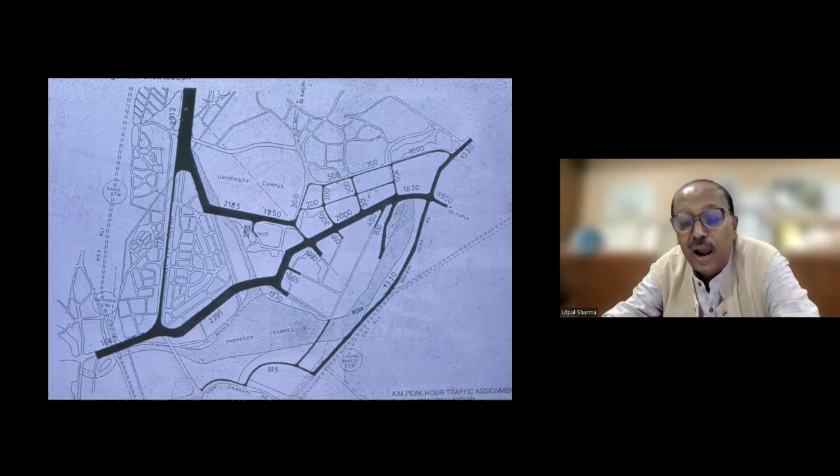And this site is very near to the present Mumbai airport, so there are certain height restrictions for this area, not more than 10 to 12 floors. We cannot really do skyscrapers because it comes in the funnel of the airport. But it gives a kind of broad scenario of the site at that point in time.

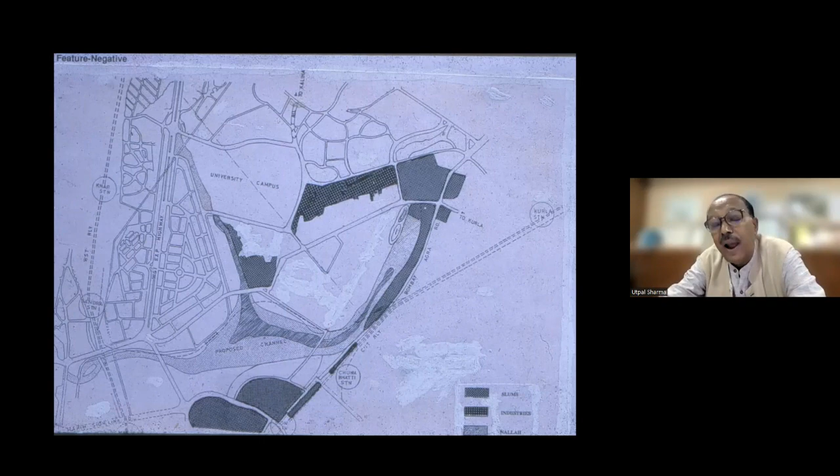As you see, the site is nothing very particularly impressive, because the site was with Mumbai Metropolitan Region Development Authority, and it was surrounded by slums. We have some creeks which are not very well managed and developed. On the other side of the creek, we have one of the biggest slums in the world called Dharavi. All of this is happening together in this piece of land, and while making a development in this area, we have to turn all these negative externalities into a positive situation. But as of now, before we started the project, the site is surrounded by a lot of undesirable activities.

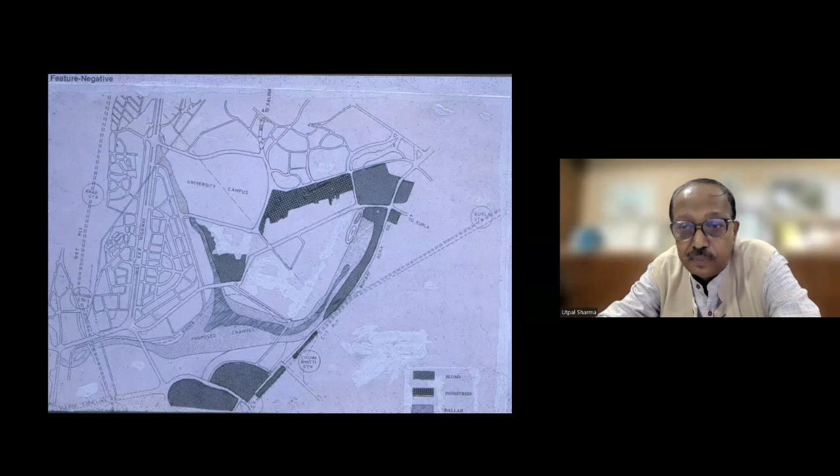And this is the creek, which is also highly polluted, but there are some amount of mangroves, and it also kind of drains the site in terms of flood water and rainfall water that goes out through this channel.

Then you see some photographs on the right-hand side, middle, that is the site, and surrounding the site you can see some slum development, some areas for housing, because the site of Bandra Kurla complex is much larger. But when it was handed over to Maharashtra Housing Development Authority, they made a lot of housing and also the business center. After it changed so many hands, now we are at the right agency with the right kind of site to take care of in terms of making a financial district.

As you see, the site is surrounded by some amount of slums, some amount of housing, and there's nothing very pleasant about the site. The site is just lying there, and slowly, if we had not developed the financial center, it may as well have been encroached by some of the slum dwellers.

But at the same time, when we started this project, we thought we need to learn from the city of Mumbai and some of the cities across the world in terms of defining the built form character and the kind of image that you want to have for the new citizen.

So this part is called the DN Road in the city of Mumbai. Basically, low-rise, high-density buildings of 4 to 5 floors with an arcaded street, etc. That's what is the kind of peculiar character of the city of Mumbai.

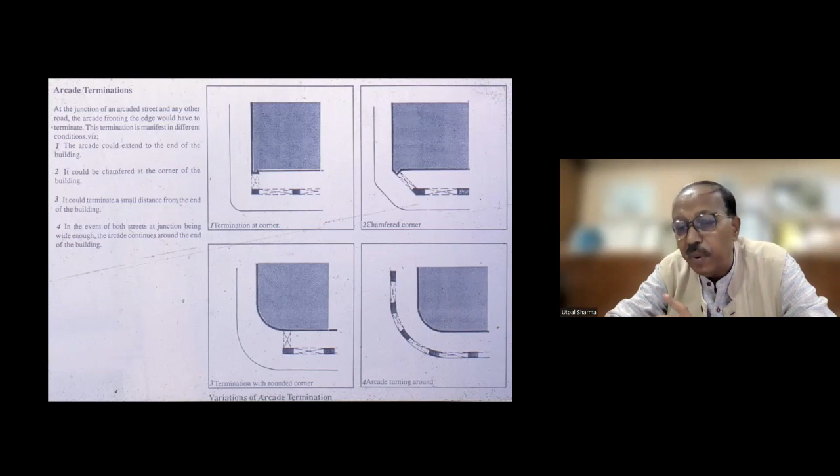There are also some studies carried out by some of my students in terms of the arcade, how it terminates, how it goes, etc. We thought that in a city like Mumbai, where you get a lot of rainfall and a lot of people walking around, an arcaded street may be a good idea even to pursue in the new proposal for Bandra Kurla.

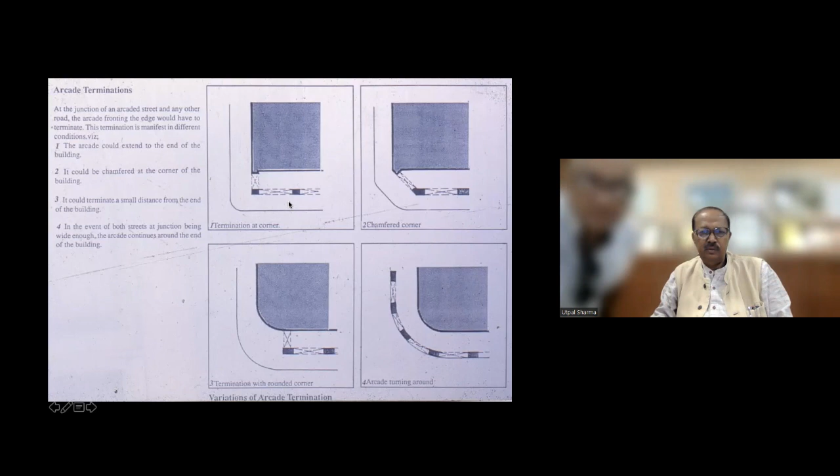Then there's some of the business district areas which already exist. There's a lot of informal activity that happens during the day. In the evening hours, people go back home and some of these places where business was happening become very deserted, and it becomes a kind of dead place in the evening.

So we also thought that when we were doing this proposal for the Bandra Kurla complex, we have to create life in the public space throughout the day and even at night, so that we can have a certain desirable kind of activity mix, so that this place doesn't become a dead place after office hours.

These are some of the areas, Ballard Estate areas, where some of these Tatas and Birlas and big business houses operate from. This place is basically at one corner of the city of Mumbai. Everybody uses taxi as public transport and doesn't really bring in their own private vehicle, and this area works very well with a taxi system.

Some of the areas are called Horniman Circle, done during the British time - a beautiful garden in the middle and an arcaded building with 4 or 5 floors. This can really define the character of this area, which was done about 100, 150 years ago. But now in modern urban planning, we have buildings as some kind of boxes, and it doesn't really have the character that this place talks about. We thought that when making a new plan for the Bandra Kurla complex, we have to bring some of these characters into the new city we are trying to build.

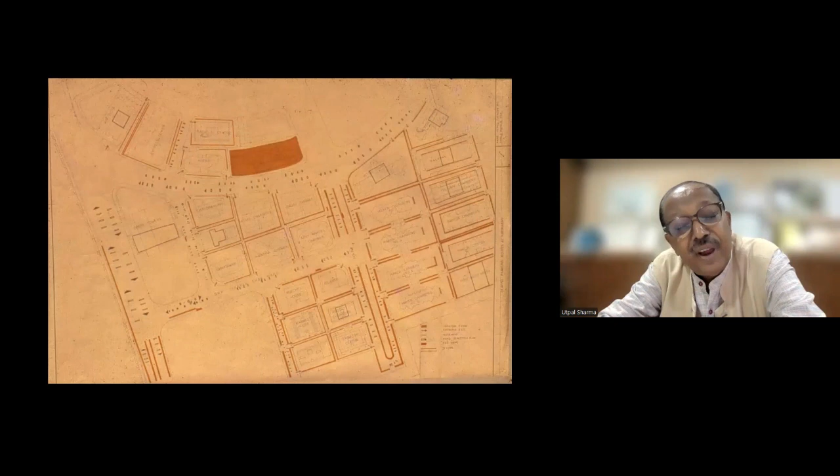Then these are some studies of the core areas of the city of Mumbai. You can see the simple subdivision of plots, very little parking, compound walls between properties, and a lot of traffic jams and congestion in this area. We'll see some of the pictures.

What you see is the kind of present financial center for the city of Mumbai, where it has no character - we basically have certain high-rise buildings. It doesn't really talk about a befitting character for a financial center like the city of Mumbai.

There's also a whole lot of informal activity happening around business houses, where people come for breakfast, lunch, etc. If we don't provide for it, they occupy the public spaces, particularly the footpaths and street corners, and many economic activities take place there. So in the new plan, we have to take care to provide for such informal activities also.

Then this is some of the areas developed near our site as a kind of office complex for financial centers. But here is what the government does - they design one building, change the facade a little bit here and there, and repeat the same building. That is not really the urban design you talk about. This is just a congregation of buildings to facilitate certain economic activities, but it doesn't really talk about a befitting character for a financial district.

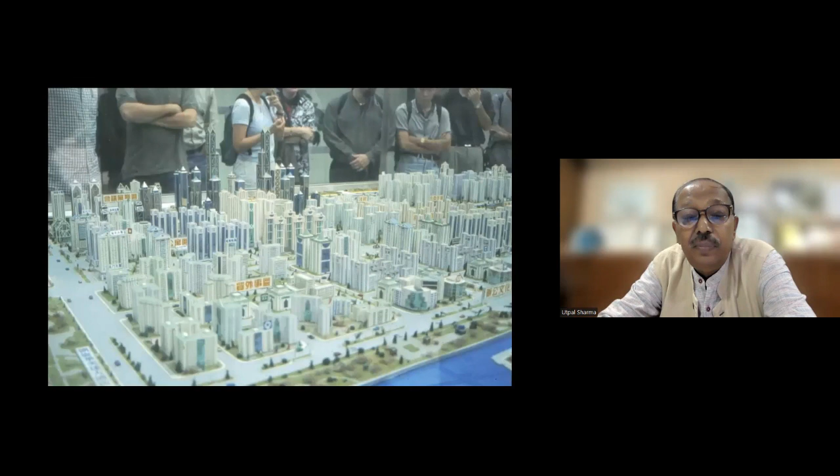This is the new city center for the city of Guangzhou, with a population of about 12 million. This is what they were doing. These are some of the study models—all high-rise, high-density cities that they were talking about.

From there we had a chance to come to Shanghai, and from there to Hong Kong. Hong Kong is a very polished city. You find that Hong Kong is one city where almost 97% of the traffic is in public transport. Roads are not very wide, but there's not much traffic. The FAR, because of the urban form of the city, was almost anywhere from 10 to 12, which is very, very high. Mumbai is still talking about FSI 1.5 to 2, but Hong Kong is talking about FAR 10 to 12.

The whole core city area is connected by an elevated pedestrian network, connecting to the various buildings and also to the public transport system, the metro system, and also boats taking you to the various islands. Everybody is busy walking around, and it's a place where you can walk around without having to cross the vehicular road because you're operating at the second floor level.

Look at the city—there's hardly any traffic, but everybody is using some kind of public transport system. Roads are not very wide, but there's no traffic because they really emphasize public transport as a way of life for the people of the city, and they invest very heavily in the public transport system.

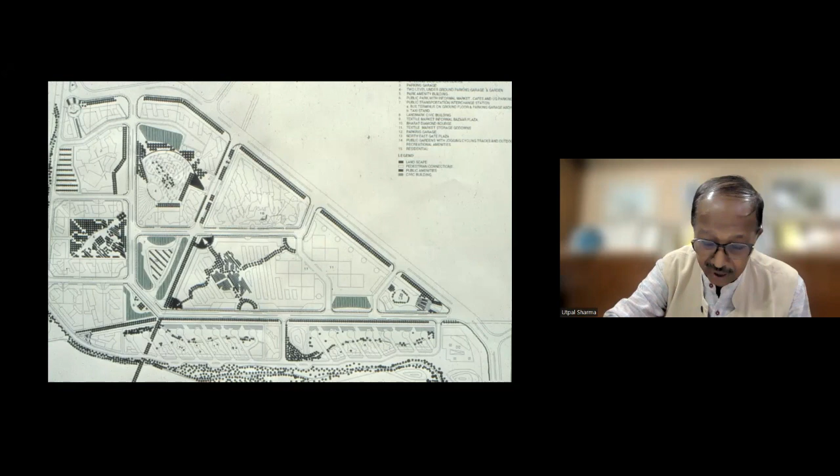For the Bandra-Kurla complex, the Mumbai Metropolitan Authority had no clue how to develop this area - they were basically subdividing land and selling various parcels to people. I was working on one of the projects of the Bharat Diamond Bourse with Professor Doshi, and we told him how can you make a plan for an area of 8 hectares of land with multi-level offices without an overall plan for the area. So we insisted that we would do a preliminary master plan to show what can happen, and then they should appoint somebody to properly do the master plan for the area.

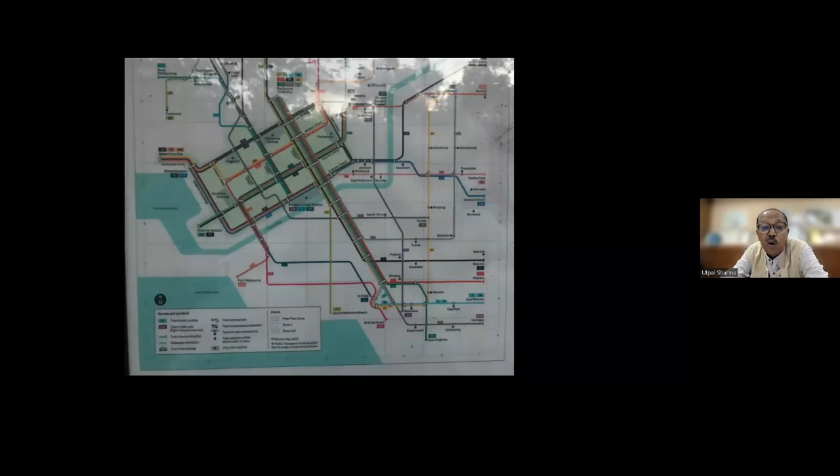As part of this, I also had a chance to visit Melbourne, and we saw that some city blocks are slowly being made pedestrian with vehicles eliminated. Now people are basically on pedestrian streets and public transport, and the city is working quite beautifully as a pedestrian-friendly city with bicycles and public transport, with cars slowly being eliminated.

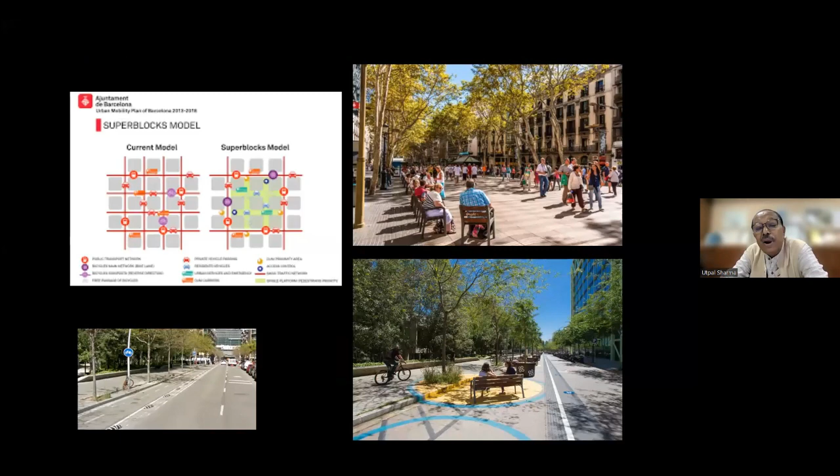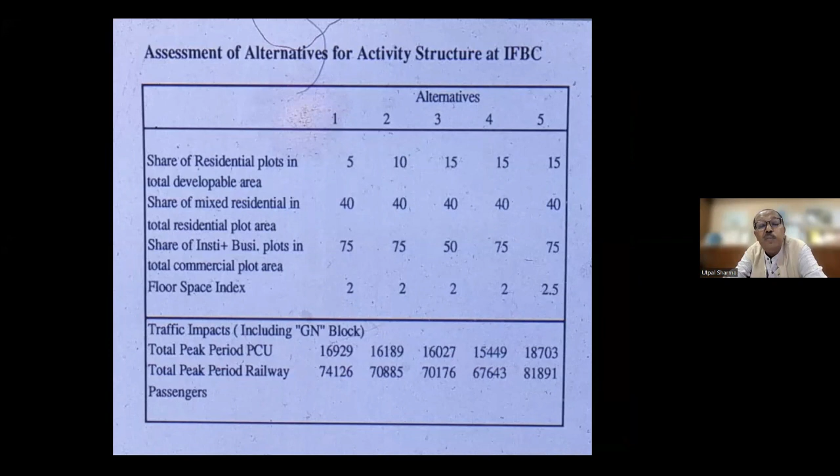Now coming back to our site, for the Bandra Kurla complex we had about 120 hectares of land - so how much traffic can we handle, and what kind of activity mix can we propose? This is a place where you can talk about a higher FSI if you want. We worked out various alternatives with respect to the mix of residential and other activities, and finally tried to relate it back to the traffic it would carry.

Eventually we presented to the government saying we could get an FSI of around 2.5, with a higher share of residential population living in the Bandra Kurla complex, because they would live and work in the same place, and in fact reduce the traffic. But finally the Assembly of Maharashtra gave us an FSI of 2, not 2.5, but this is still much more than the 1.3 that is happening in Mumbai.

We got an FSI of 2, and we moved ahead with a proposal for Bandra Kurla complex in terms of urban design with an FSI of 2. And this was the kind of political decision.

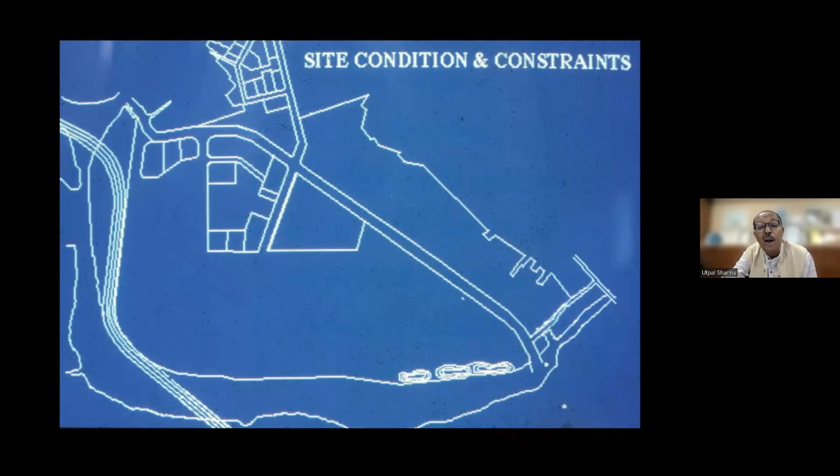And this is the kind of diagram when we started the site. These are a few of the buildings that are already happening on the site, and there's no master plan.

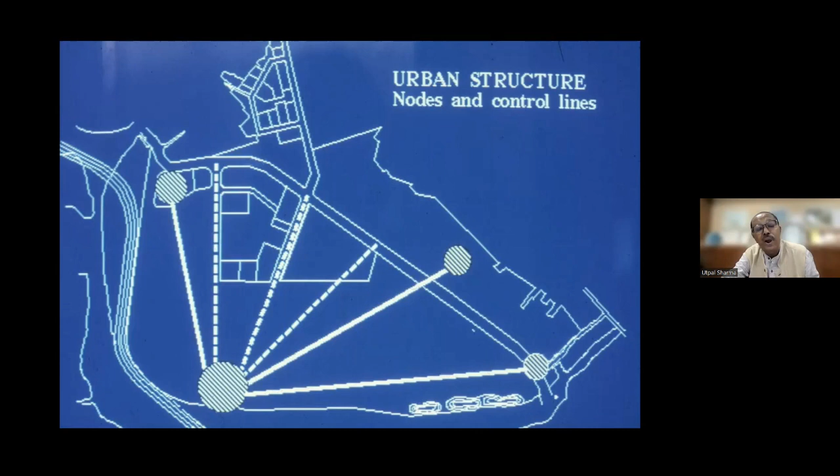We thought one of the important issues is that this site will be connected by a railway network along the creek, with a station that will bring in almost 45% of traffic to this place. There will also be a pedestrian network, and these become important ways to really make a master plan for this area. Second, because all the buildings will be air conditioned, they will face north and south with respect to energy calculation, so that we can optimize on the energy.

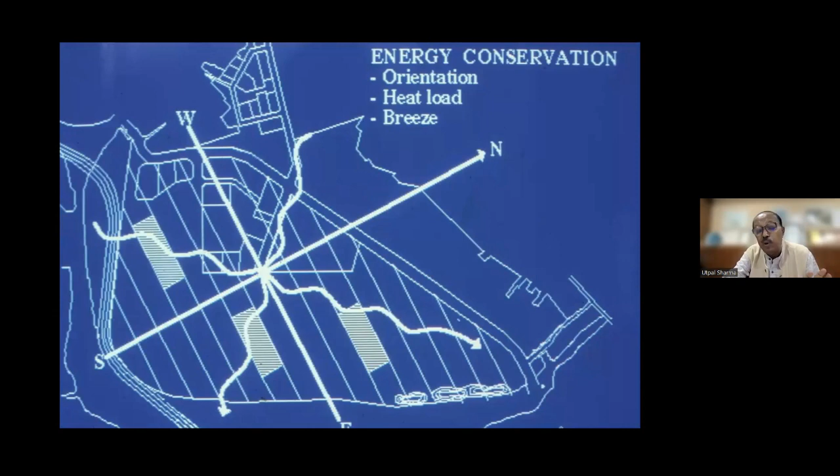And these are the kind of determinants of really preparing the master plan for this area. So we prepared a preliminary master plan, talking about a small Horniman Circle kind of area and a big garden in the middle connected to a railway network.

We presented this to MMRDA, and they said, okay, in principle this is good. But we started further working on this area, and eventually the plan slightly got modified, and we have a plan.

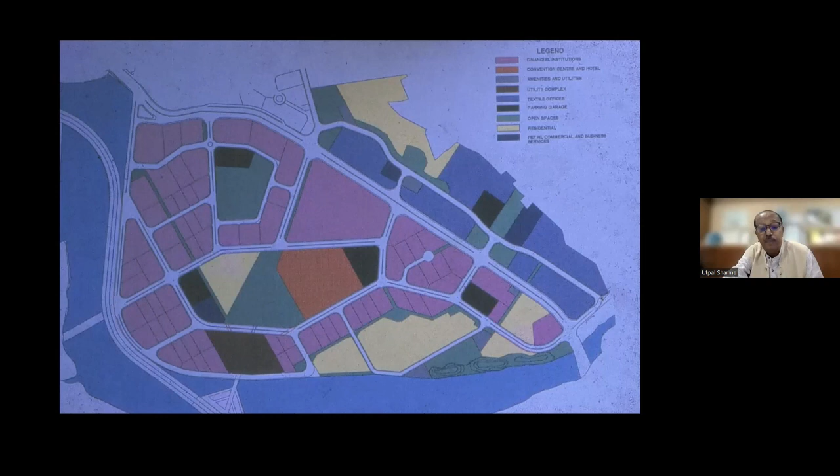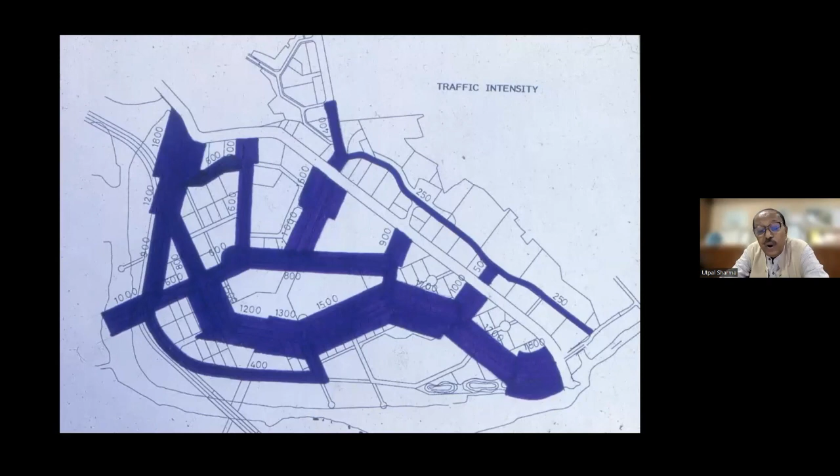We also simulated the traffic to decide on the width of the road network and its design. We also worked on the pedestrian network from the railway station to the various places, and the width of the various pedestrian networks was worked out.

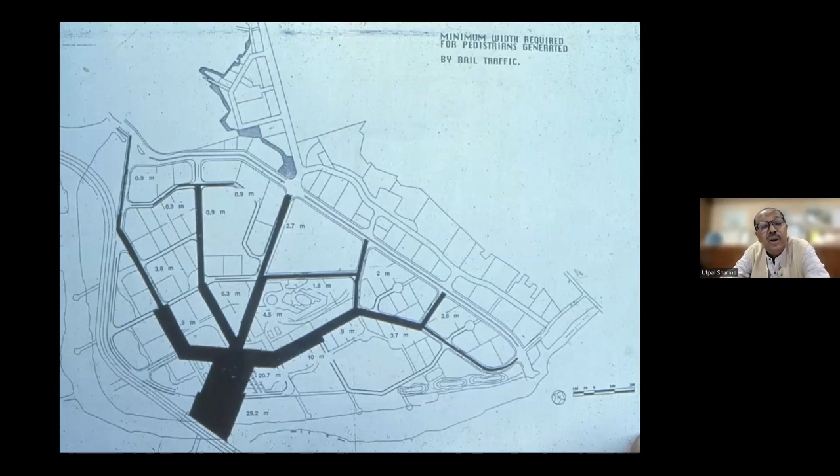These are some of the areas where parking is a major issue. Though 85% of traffic will use public transport, there will still be some multi-level parking garages required, besides parking under every building, which will also develop as a kind of public activity space.

As part of this, we carried out a study for the city of Mumbai in terms of the built-up space various organizations wanted. Finally, we said the minimum size of a plot should be around 3,000 square meters, where you can build an FAR of 2, because below that plot size it is difficult to provide parking under the building.

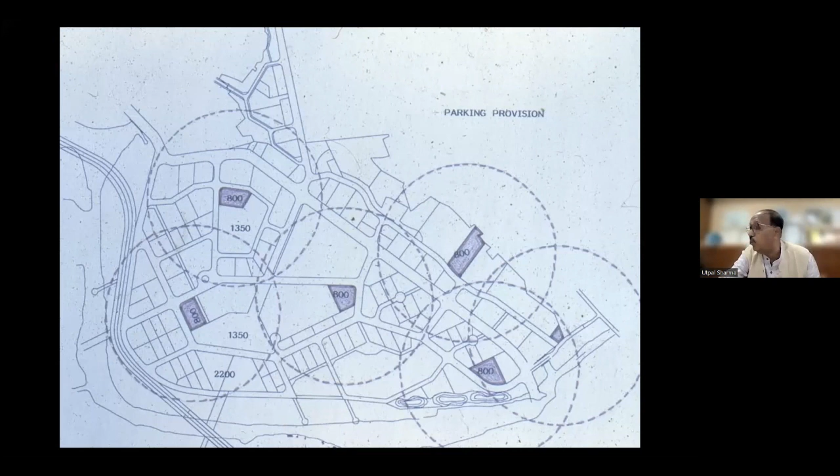So anybody wanting less space can buy a floor from a particular builder, but if anyone wants an independent building, it has to be a minimum of 3,000 square meters and above. Below that, we don't sell plots to small developers, because we need to provide parking under each building. That's how the plot size was slowly determined, taking a broad framework for the master plan.

And this is the kind of urban design framework, an interpretation of the plot subdivision and kind of building that can happen. We think some important streets, particularly one main street, should have buildings connected with a public square, with buildings having an arcade, podium, and certain towers.

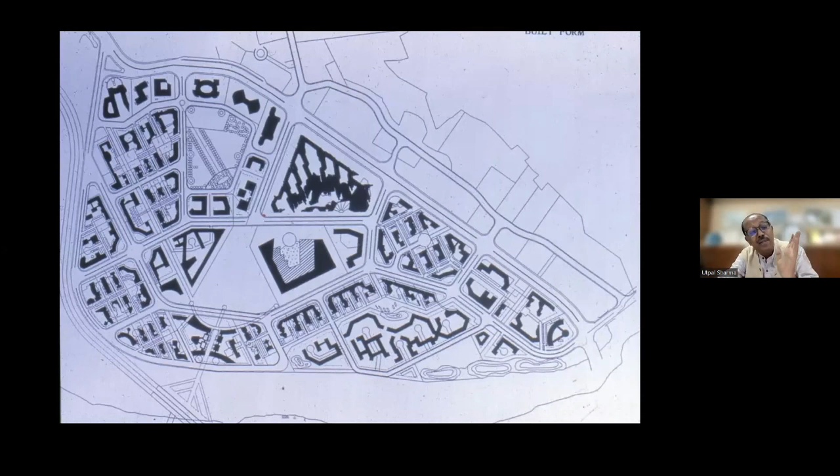The rest of the buildings are basically simple, on a plot with podium and tower, each facing with the longer side towards north and south. That's the kind of overall urban form we envisaged in the master plan that was earlier prepared.

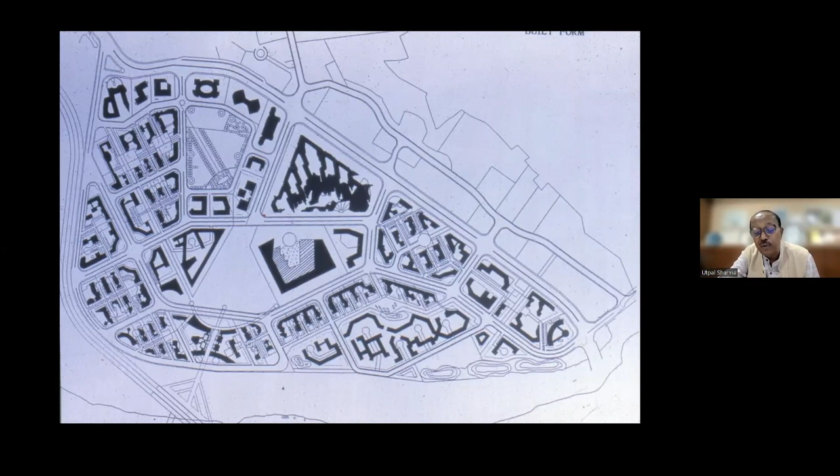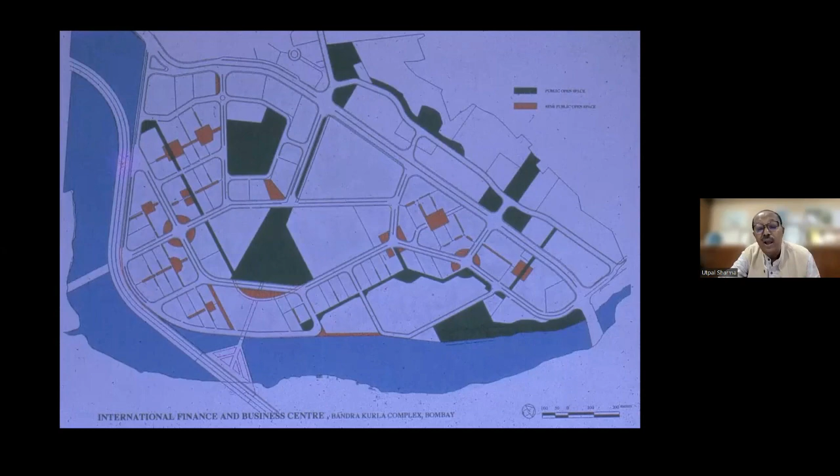We also created some additional public space from the owners of the plot by carving out certain land as public space, in addition to what is formally provided. This created some small spaces, which we thought was very much required.

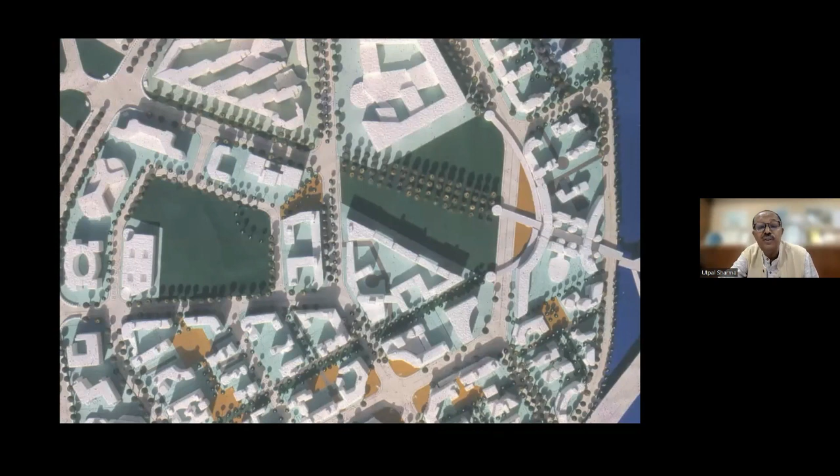This is the kind of study model for this area, showing how the built form can happen. This is somewhere around the railway station and the pedestrian connections. This is the overall three-dimensional model of the site.

Buildings are about 10 to 12 floors, and we have control on certain important streets where building edges are controlled. For other internal areas, it's a simple plot subdivision without any compound wall between properties, demarcated instead by plantation of trees, with pedestrian connections in between.

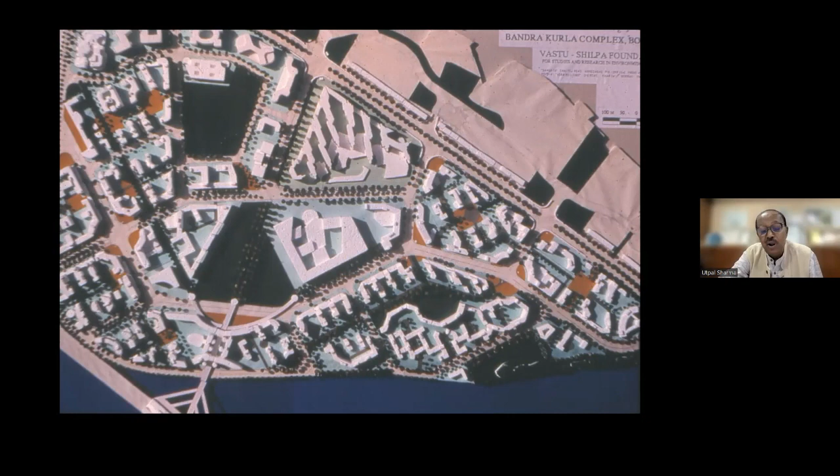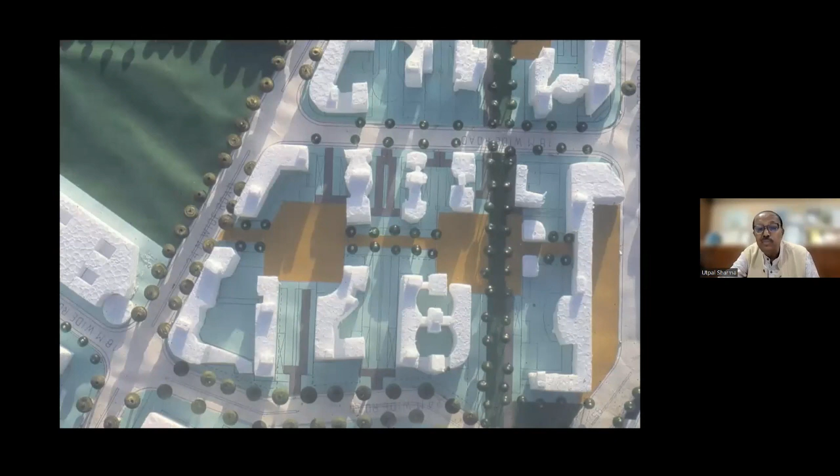This is what we thought could be a desirable proposal for the city of Mumbai as a financial institution. We discussed some of these in detail. We can see simple buildings in north-south orientation, with entry to the building from the back side, and pedestrian connections as well.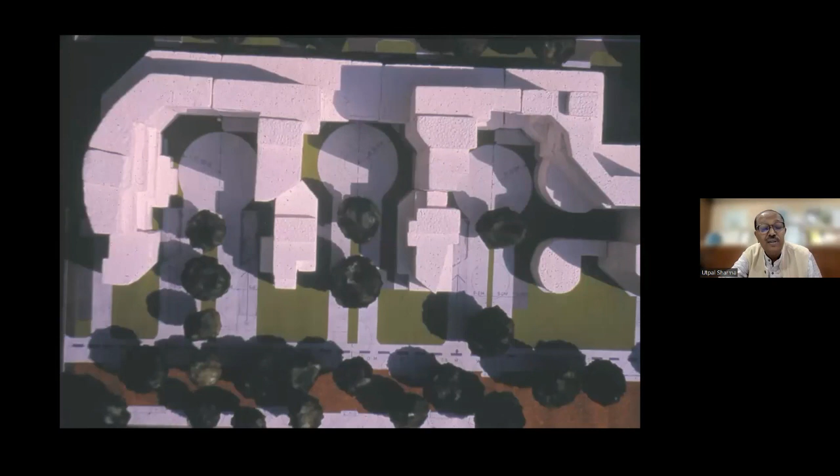We can see how fire tender movement can go around the building. We removed the compound wall and planted trees, because underneath the building it's all basement parking. It's only the little space between properties, about 7.5 meters on either side, where you can actually plant trees.

This also helped with the plantation of trees within the area, and the fire officer of Mumbai really liked our proposal for buildings having no compound wall, so every building could be properly serviced in case of fire or other natural disaster. He made it into a rule, so every building now follows this principle.

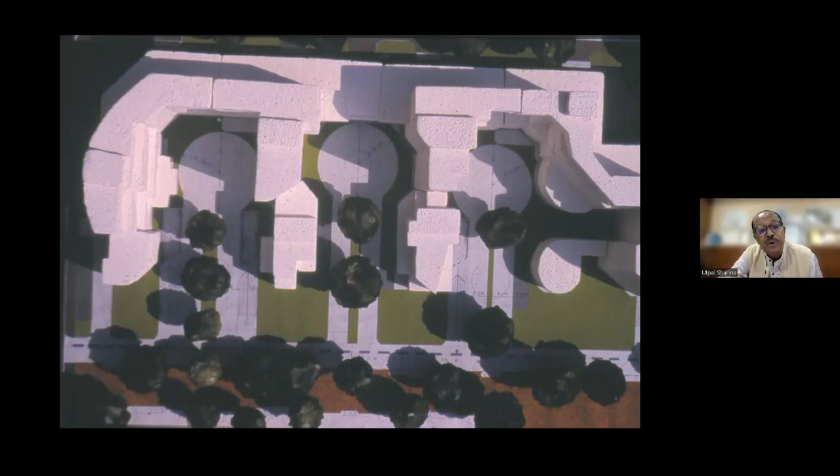On top of that urban design, along the road we have a kind of podium and arcade street where the other towers can set back and go behind. The architect can do whatever he wants, but we are only trying to control the part along the street. This is a kind of arcade street with some of the towers going behind.

When that was done, we also designed some small public spaces between the building spaces, etc. This is one of the urban blocks, with a 3,000 square meter minimum plot and a kind of building profile.

Along the edges we control the building edges depending on location, and we also facilitate vehicular movement within the block, parking, as well as fire movement and landscape. This is all integrated into one. This is what we thought should be the proposal for the Bandra Kurla Complex.

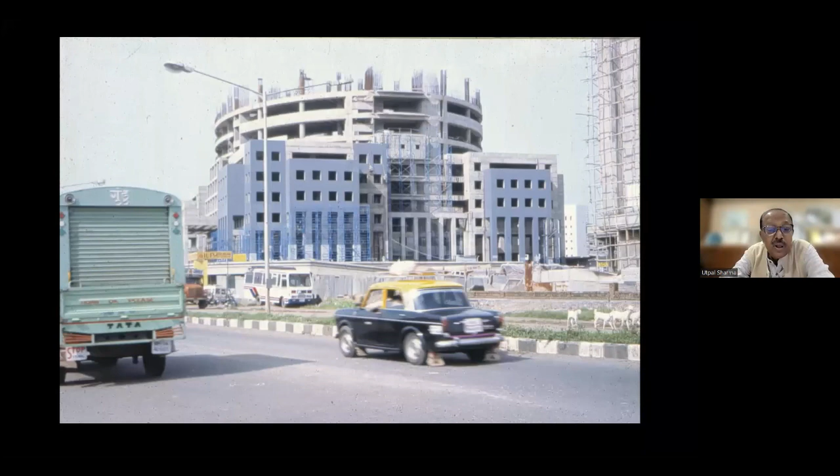We can see some of the buildings that were coming up at that point in time. Now the buildings are completed. This is the Bharat Diamond Bourse that was under construction, and now it is completed. These are some of the study models for the buildings.

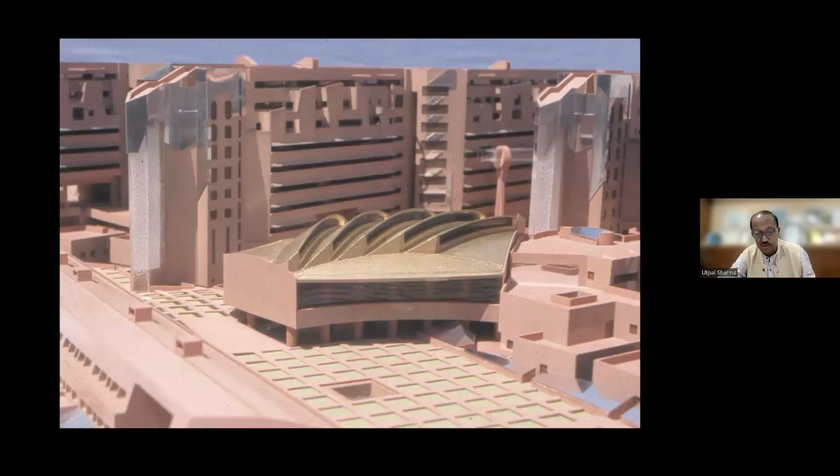This has definitely become a financial center for India, and some of the major financial institutions are now operating from this area.

You can hold on the slide for a second.

This is what we thought to be an urban design proposal. Finally, when we presented this to MMRDA and they agreed to our idea, we transferred some of the people working in MMRDA to Ahmedabad to study the urban design program in depth. We trained some of them, and now they're back at the MMRDA office monitoring the work. The project has been going on for more than 15 years, and it may continue for some more time.